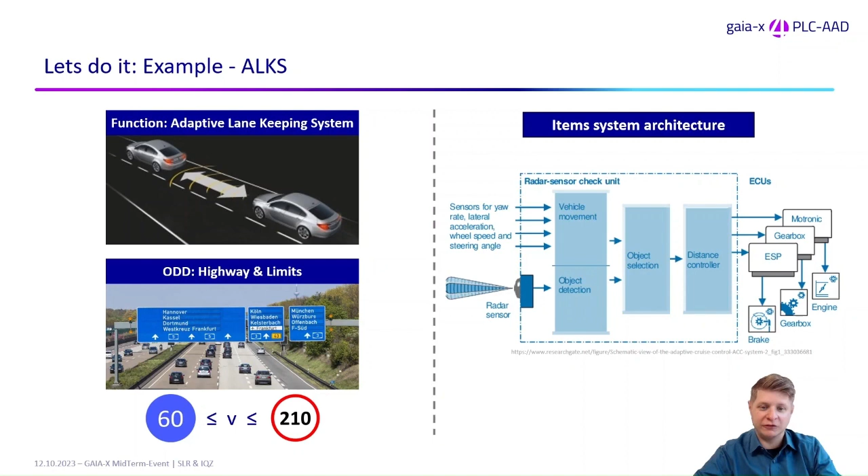Here we have taken one scenario out of the functional safety HARA. Let's say our scenario is driving on the highway at a velocity of higher than 130 kilometers per hour. Our hazardous event now is an unmotivated deceleration by the ALKS in combination with the following vehicle with a small distance. This is a kind of likely event, so it's not very unusual.

From the SOTIF point of view, we now see, are there special triggering conditions from the environment that can lead to this unmotivated deceleration? Perhaps we can have difficult weather conditions, rain, fog or anything like that. Or we can have perfect weather, but perhaps objects at the road edge which are not recognized correctly. These can be triggering events from the environment, which can lead to our unmotivated or faulty deceleration.

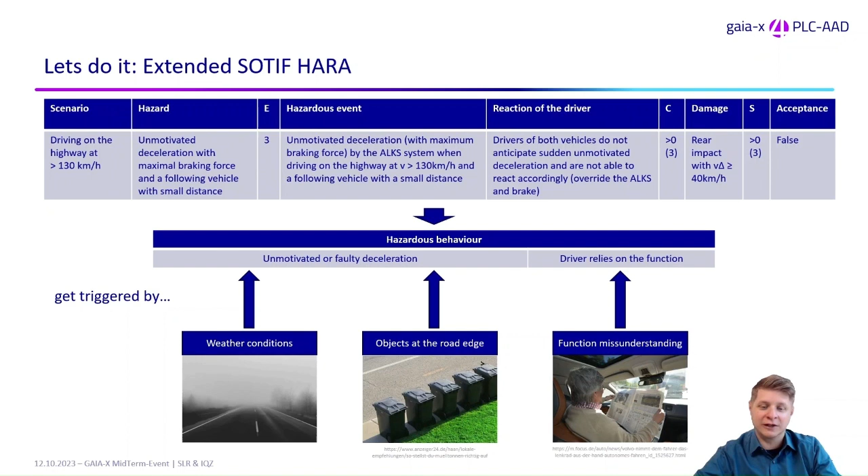We also try to figure out if the controllability can be enhanced. Perhaps if we have a driver who misunderstands or even misuses the function of the ALKS, the question is, can we redesign the system to prevent the driver from misunderstanding or misusing our ALKS system? The next thing is to see which options we have from a SOTIF point of view to modify our system to limit the ODD or to monitor the driver, because these are the two major things we're looking at here in our SOTIF example.

To limit the ODD, we have to detect the ODD. Perhaps if we want to prevent the ALKS working when it's icy cold, then the question is, is the sensor capable of detecting icing? And if the sensor is not capable of detecting icing, then the question is, can we use some other higher system sensors or algorithms to limit the ODD?

So for example, we can use the temperature sensor and limit the ALKS to temperatures above 0 degrees, for example. Of course, the improvement of the system itself, in this case the software algorithm, is an option, but let's say that this is quite expensive and not always unlimited possible.

And then the third thing is to monitor the driver. When we say in this example here the driver has to pay attention to the road, then one possibility of making sure that the driver is actually paying attention is to monitor him with interior cameras.

And now we need to verify and validate this SOTIF concept to see if our system modifications, limitation of the ODD, improvement of the system, and monitoring of the driver have the effect that we need for a safe procedure here. So at first perhaps we can see if our improved object recognition works with a software in the loop simulation. Here we can see if our improved object recognition recognizes the objects very well in simulated weather conditions like rain and snow.

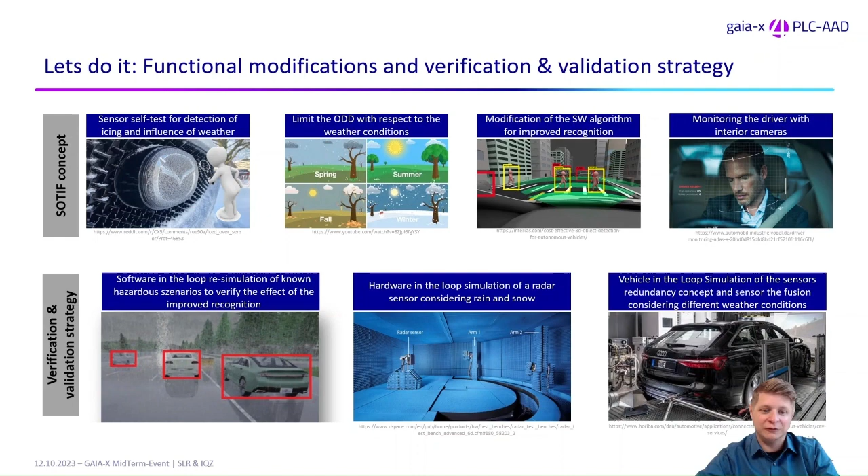Yeah, thank you, Fabian. So this is actually a very important aspect. As this V&V strategy typically uses simulations, we need to raise the question, can we blindly trust these simulation results? So if the simulation results are not reliable, especially if they yield false positive results, the risk assessment itself is not reliable. And to understand what is additionally needed to make this risk assessment reliable, it is worth having a closer look at simulations in general.

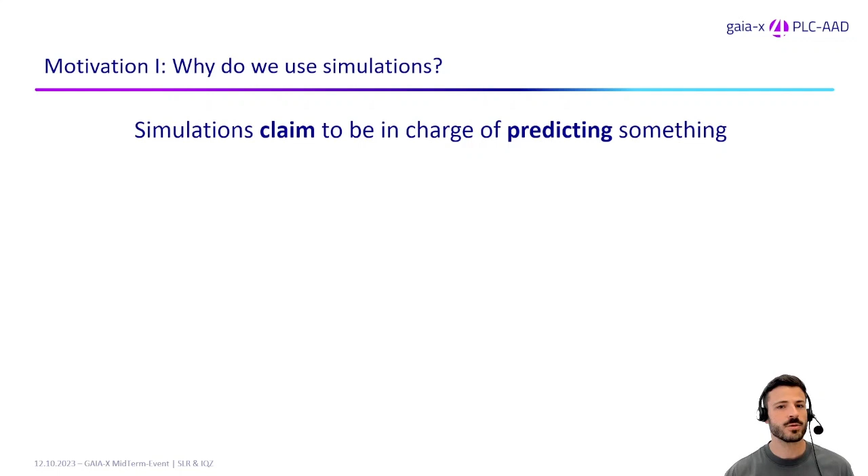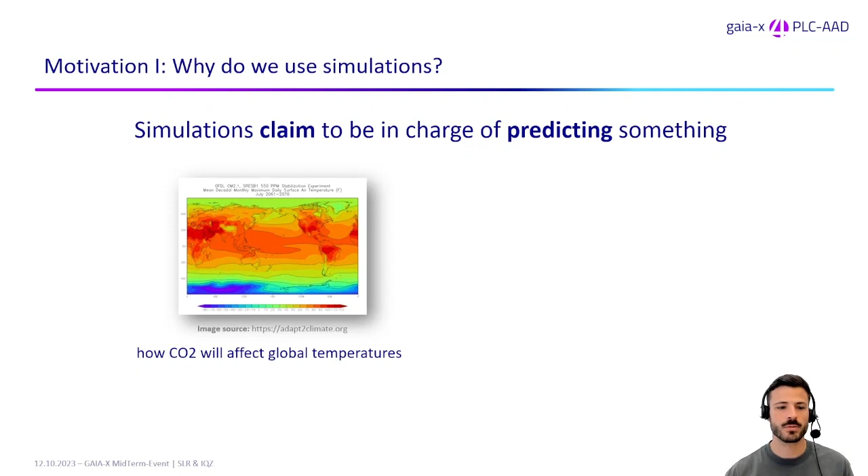Why do we use simulations at all? So either we want to predict something that we cannot measure, for example, the CO2 effect on the global temperature, or we want to predict something that we could measure but we should not really measure, for example, if you will survive a crash in your car. In automated driving especially, we got the case that the effort to take for real measurements is not acceptable at all. So we predict how AD cars will behave by simulating certain scenarios.

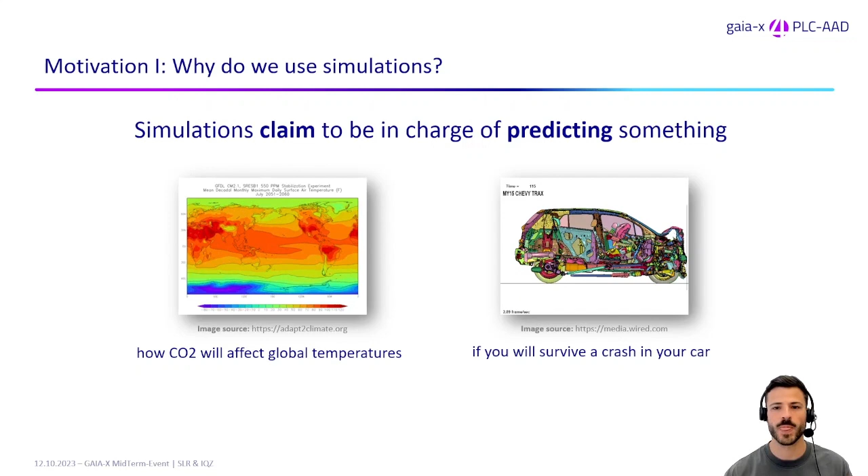In the end, we always want to predict something. And there is an according simulation that claims to be in charge of making that prediction. So the important point here is, can we trust these predictions? Trust in simulation has similar limitations as trust in AD functions. We can only minimize the remaining risk of a false behavior.

We cannot exclude this risk entirely, because there are too many physical effects, too many parameters, too many unknown confounders that cannot be considered entirely. Otherwise, the simulation would become too complex and the effort would not be manageable. So, this also means that a specific simulation is a representative of a system's behavior, not of the system itself. And therefore, validation of simulations must always be done context dependent. And this context is represented by this so-called claim. Now, to minimize this risk, we need evidence that gives us indication that the simulation's claim is not false.

So, let's have a look at an example. We have a sensor simulation here during rain or snow. A possible claim could be that the simulation can be used in our SOTIF V&V strategy. A possible prediction of this simulation could be that the probability is below 0.1% that this sensor is triggering unmotivated deceleration in rain or snow. And I want to assess the risk that this prediction is unreliable.

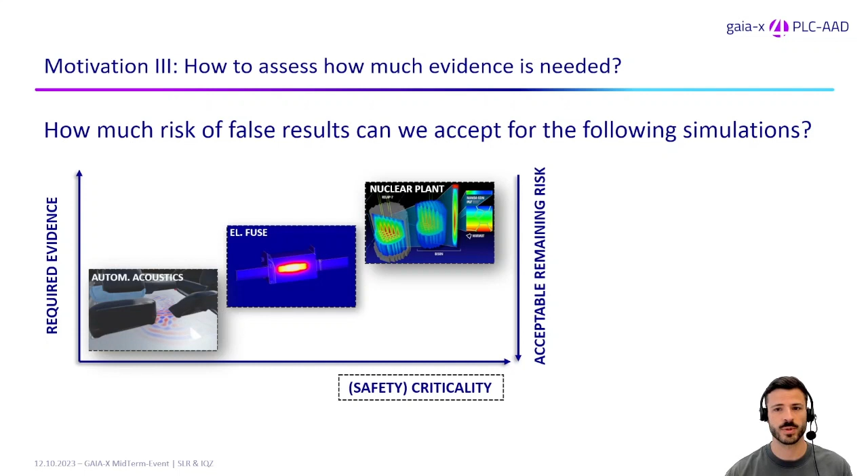And in the end we can sum up: the more safety critical the subject of a simulation, the lower the acceptable risk. And this leads us to the concept of the criticality assessment. A criticality assessment is the entry point for making a credibility assessment, and it tells us how much evidence we will need, or the other way around, how much risk is acceptable. By concept, it is done on a discrete scale of 3 levels, which we call criticality levels.

And what kind of inputs do we need here? First, we need to have an estimation of a product-related risk, which means which bad events may happen, how likely are these events. We rate it internally on a scale of 1 to 10. And further, we need to assess how much influence a specific simulation has towards the higher level decision in the product development.

Here in our example, the higher level decision was if I can accept the risk that an unmotivated deceleration is triggered. And typically, this service is offered within a front end, which guides us through all of these steps. But if all of these inputs are already known, if they are existing because they are the result of the SOTIF assessment service, we could then automate our criticality assessment service.

So let's have an overview again of our 3 services then. Our goal is to minimize the risk that simulations given in the V&V strategy of the SOTIF assessment yield unreliable results. For this, we want to use the credibility assessment. But before I can step into the credibility assessment, I need to evaluate how much risk I can accept. So therefore, for our service composition, we concentrate on the SOTIF service and the criticality assessment service.

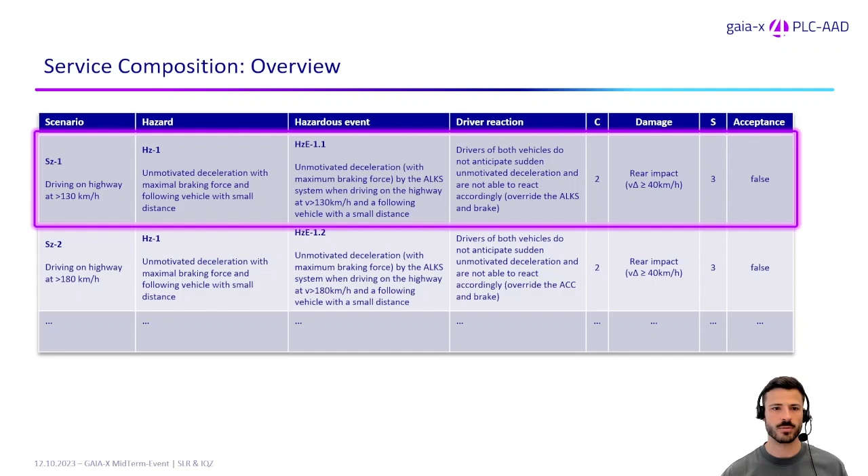Typically, the criticality assessment service gets inputs from the SOTIF assessment that will look like the following depicted. And I'm picking up one of these examples of Fabian again, the unmotivated deceleration, which is a hazardous event. And for this hazardous event, we will have a V&V strategy. And that must be followed to minimize the acceptable risk that this event occurs under the given triggering condition.

So, as we can see in our V&V strategy, there are 5 tasks to accomplish, and 3 of them are even simulation tasks. And let's pick out now one of the simulations, the simulation of the sensors and sensor fusion, to analyze the redundancy concept considering snow, rain and fog. As you can already see, it has a relative importance of 40% in this V&V strategy, so pretty high.

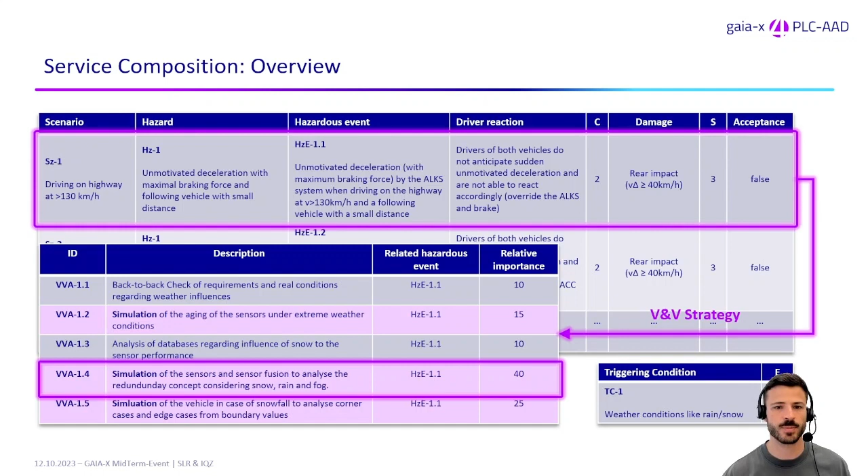So here we got an overview of all the required inputs for a criticality assessment service. So the hazardous event that an unmotivated deceleration occurs on the highway could lead to a rear impact with a delta velocity of more than 40 kph, and this could lead to people getting injured, and even life-threatening injuries could occur here. So the severity of this hazardous event is rated to 3 according to the SOTIF and FUSA standard. And now we translate this in our internal table, which is pretty easy because this is a safety related case, and we even have a label here that tells us that fatal injuries would be rated a 10.

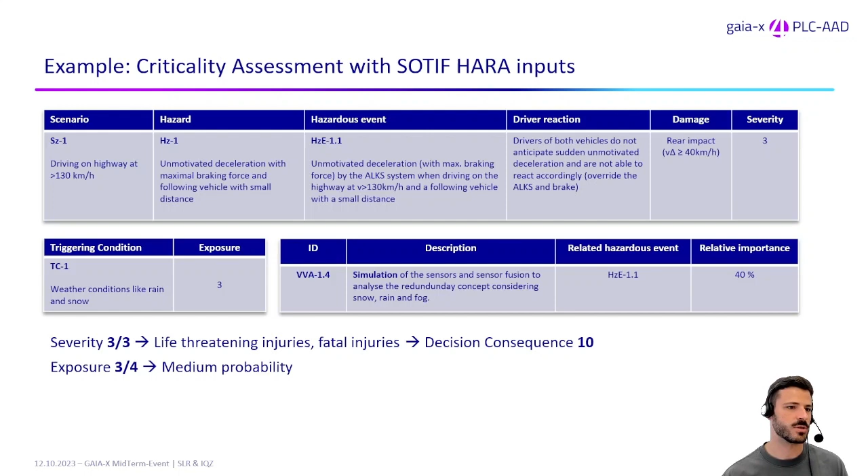Then next we have a triggering condition, and this triggering condition carries an exposure level according to the SOTIF and FUSA standard. The exposure level is a measure of how often the triggering condition will typically occur. So this exposure level has been rated to 3 of 4, which means medium probability because weather conditions like rain or snow are not that seldom. So we translate it again to our internal table as 5, 6 or 7.

And here I need to make an important note. For the criticality assessment, if you use simply safety-related use cases, you could also use ASIL levels for the estimation of the likelihood. But for the ALKS, we got safety and SOTIF, so we calculate the probability of occurrence very conservatively using the exposure level.

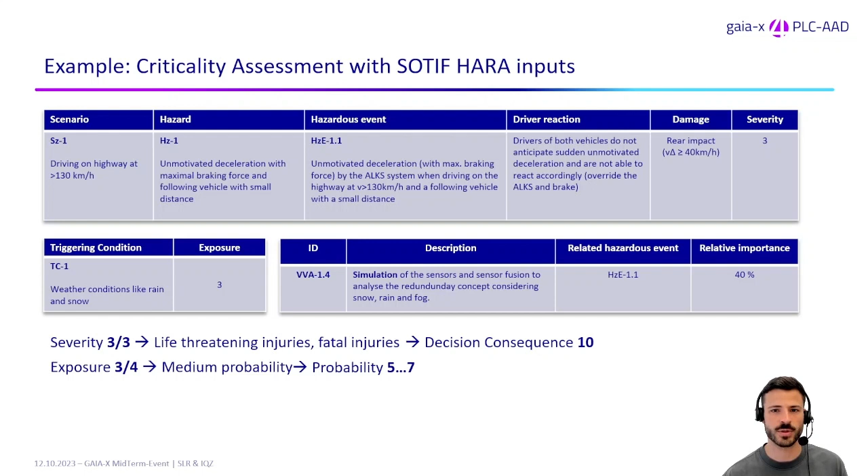So finally, we are using the relative importance of our simulation towards the final statement that we want to make, which is 40%, which is very dominant, but it could not veto other results, so in our table it would be again a 9. So what we do here is then simply multiplying all our results, and the multiplication is called a criticality indicator, and we can map this to the required credibility level here according to our internal table.

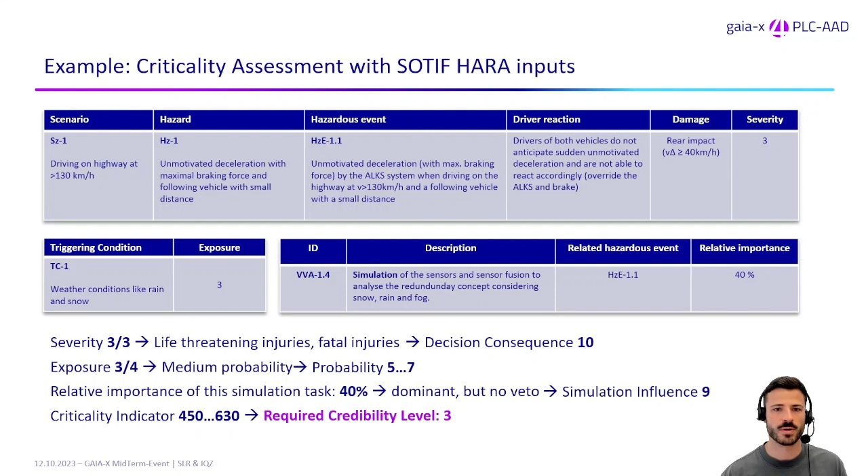So finally, let's have a look at what needs to be done to integrate these services as a service composition into the ecosystem. First, we need to finalize our input and output data structure between the two services. This is currently in draft. Next, we will create an orchestrated end-to-end demonstration of our service composition.